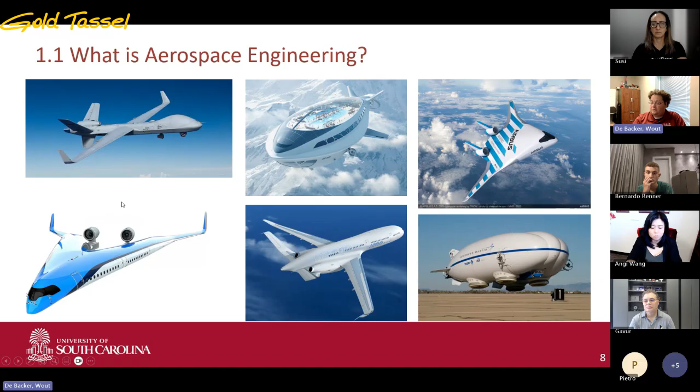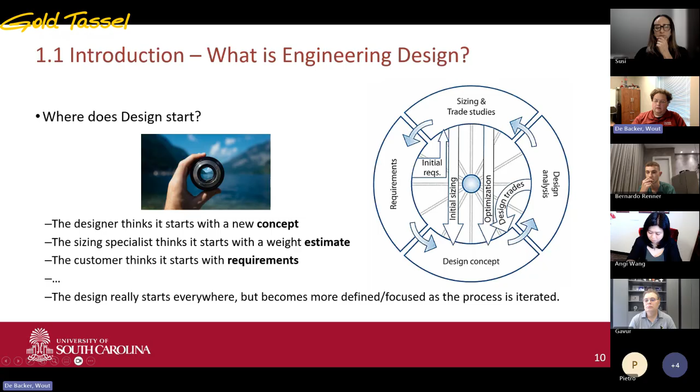So in my classes, for example, this class on engineering design, it's not just about learning how to draw an aircraft. It's also learning how to design an aircraft. So doing the math, doing the statistics, and of course also a little bit of how to draw an aircraft. So we get familiar with the design process. We learn how to move into uncertainty, which is really the key of design.

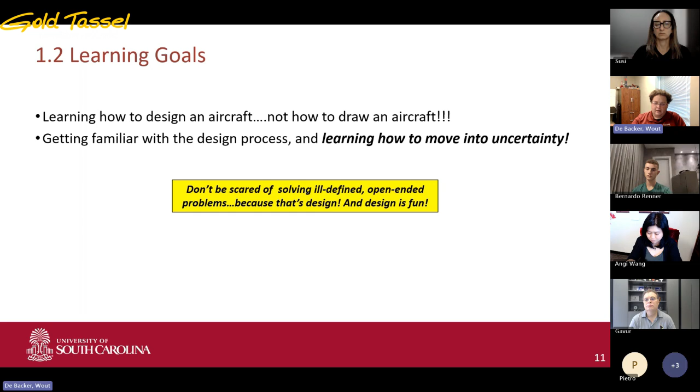If you ever are overwhelmed, or if you are ever thinking, okay, what do I do first? I have so many things to do. Designers love that. They call that not being scared of having open-ended problems, having ill-defined or poorly defined problems, because all of that is part of design. And as a designer, you think that's fun. So you think design is fun. So if you see like you have too many options and too many things you could be doing, well, that's the fuzzy cloud. How do we go through iteration on iteration to make it a little bit more sharp so we know exactly what we need to do on our next step and come up with a real working design?

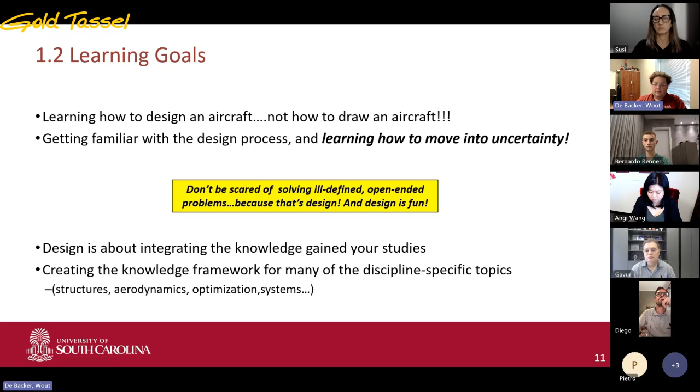Well, that's the idea. How do you turn that into a design? Well, that's where the engineering design process comes in. We turn it into blueprints, we become the architect of our dreams and build it into something real. So that is the main design process.

I know this is only a couple slides of introduction to aerospace engineering design, but it gives you a bit of an idea of the type of topics we talk about. And of course, after a while, there's a lot more equations, but I'm not going to do that to you. I'll show you one equation today, and that's all.

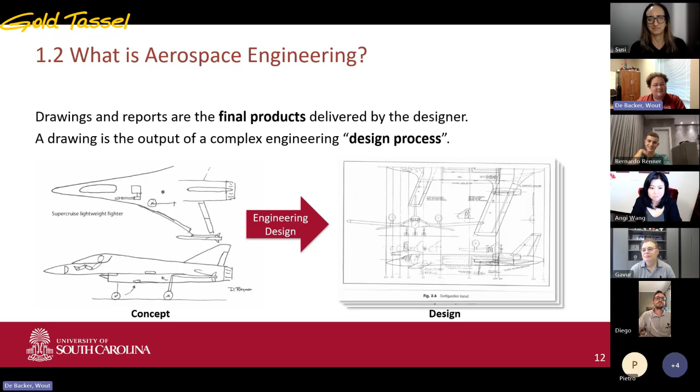So as an aerospace engineer, now that you have a bit more of an idea of what it means to be a designer and an engineer, let's look at some key fields of study that bring this all together. And in the background here, I will try to include as many pretty pictures as possible.

So when we bring all those fields of study together, they all have to collaborate. And more than any other discipline, aerospace engineering is about finding compromises between all the different parts of a problem that you're trying to solve.

If you ask someone who does aerodynamics what is the best airplane, they will give you something that looks like this airplane here, which is all very sleek and sharp and looks very aerodynamic. But if you ask someone who designs the engines, they're like, well, let's put the biggest possible engine in it. We love big engines, so let's make it go fast. Or someone who designs the electrical system will say, we need all the electrical system to power everything.

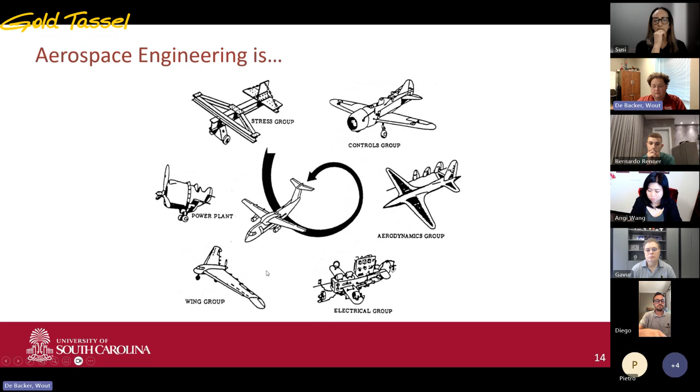But it's really not one or the other. It's a combination of everything working correctly together, interfacing correctly together, that gives us a good quality, coherent design.

So some of the fields of study you may see in aerospace engineering are related to aerospace structures. So you think of manufacturing, fabrication of an aircraft, and analyzing the structure, testing it, doing fatigue and fracture mechanics, seeing how long the aircraft will live, at what point we need to start replacing parts of the aircraft, doing a stress analysis or a load analysis, and selecting the right materials and defining new materials that work for our designs.

And they can't be too strong, because then it means the aircraft will just be too heavy. And they can't be too weak, because then, of course, we have to redesign the aircraft. So it has to break at a certain exact percentage of deflection here from the ground. And that's what we do.

I always like to joke that as an aerospace engineer, we try to make things that just don't break, or don't just break, right? What that means is we make things that are designed to break at a certain point, but usually that point should not occur during normal parts of the aircraft's life.

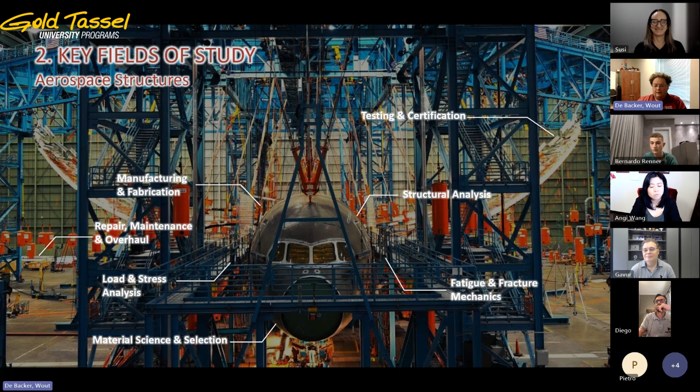Other parts of this may be flight performance and propulsion. So think of dynamics, looking at weight and balance. Where is the center of mass? How much thrust do we need? What does the airplane performance look like? The stability and control characteristics. Can we fly the aircraft? Can we land the aircraft at low speed? Do we know what the equations of motion are?

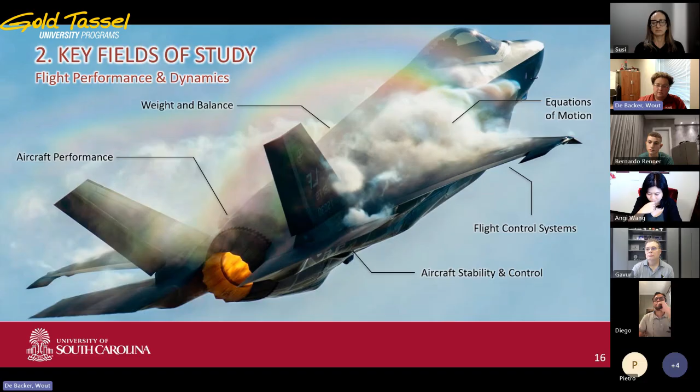How is it going to behave throughout its life? How is it going to behave when we fly through a storm? Do we need special computers on board that can help us navigate through different weather events? And of course, power, right? A lot of aircraft design is around the engine. So thermodynamics are going to be a big part of that.

Heat transfer between the hot combusting fuel and the fuel tanks themselves. Because what is a rocket, but just a fuel tank on top of a nozzle? Looking at rocket engine design and components, propellants and combusting, how can we get the best performance out of our fuel so that we can carry less of that fuel, and optimize the weight as much as possible.

Think about new concepts: propeller engines, turboprop engines, combustion engines, gas turbine engines, electric engines, hybrid propulsion techniques. All of that ties into strong backgrounds in physics, in thermodynamics, in knowing what energy we put in and what energy we put out, and how little losses we can have along the way.

So we're looking at new types of propulsion for aircraft. In particular, electric and hybrid propulsion are now at the forefront of the development.

But then in space, we're looking at what is the effect of the space environment? What communication systems can we have? We all use GPS now or something similar to it on a daily basis. That had to be put up there at some point. What kind of electrical systems do we need for space systems? And how do we make sure that our satellites don't fall out of the sky?

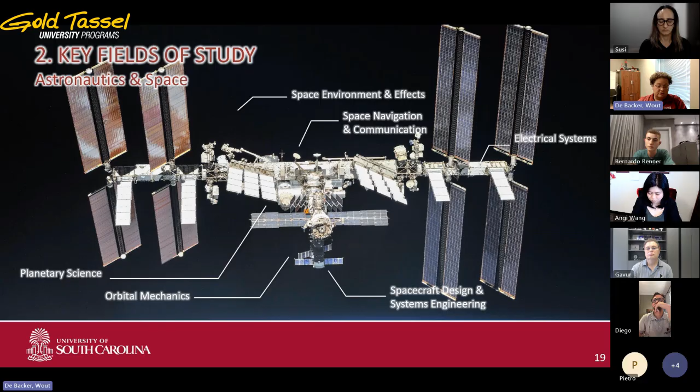So the orbital mechanics and the planetary science we can do from space can help us predict the weather, can help us predict forest fires, or can help us deploy emergency personnel to disaster sites, for example. And all of that requires spacecraft design and spacecraft systems engineering, which is something an aerospace engineer would do when they're working in the astronautics and space field.

Finally, I have an example here on aerodynamics, where, of course, a lot of what we do is flying through air or through denser materials. So compressible flow, experimental methods, flow behavior and boundary layers, wing theory, airfoil theory—these are all topics that you will learn as an aerospace engineer if you're interested in this.

And there it is, there's one of the two equations for fluid dynamics here, telling you about the Reynolds number, which is really just a scale number to say, well, if I can make the aircraft smaller, does the air still behave the same way around my aircraft?

So I know I'm throwing a lot at you now. So it sounds like with all the pictures that I've been showing you, we've figured a lot of this out already. So what is there left to do in this field of study?

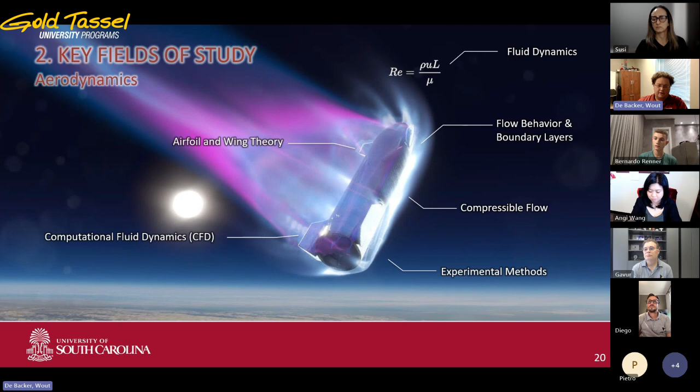They say that aerospace engineering is easy. It's like riding a bike, except the bike is now on fire and you are on fire and everything else is on fire. So how do you get through a challenging design problem here so that even if everything is on fire, you can still survive your mission?

So we are trying to solve the next generation of aerospace problems, and that means environmental impact and sustainability. How can we make aircraft less polluting? They are flying very high up in the atmosphere and they're dumping a lot of fuel. So how can we make that give us the best possible performance?

So how to make them cheaper, how to make them more efficient, how to make them safer and more reliable. Different propulsion systems—think about electric propulsion or hybrid fuel cell technologies—maybe making some aircraft unmanned. So how can we observe sites without having pilots on board?

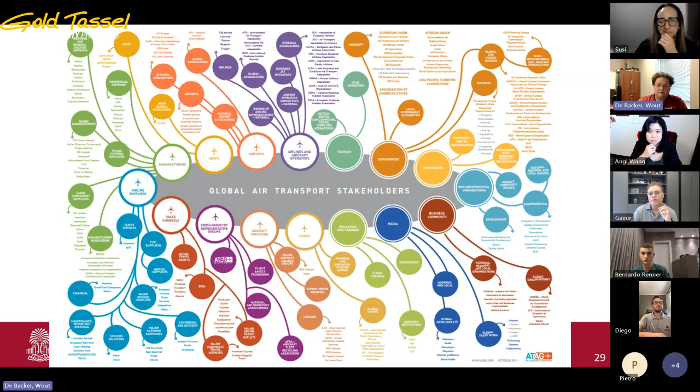Now, I wouldn't be doing my job as a professor at the University of South Carolina if I didn't tell you a little bit about what that means for our students here. So now that you know what the aerospace engineering field is and what we do, how do we approach that challenge here in Columbia, South Carolina? Our primary offerings for undergraduate students are an aerospace engineering bachelor's of science in engineering, or mechanical engineering bachelor's of science in engineering. Those two will get you the closest to the aerospace engineering field right away.

Of course, if you do any other major, you can do minors in aerospace, mechanical, or nuclear engineering. If you already have an undergraduate degree, you could think about one of the graduate programs in aerospace or mechanical engineering. The University of South Carolina's engineering program is ranked 81st in the nation and among the best engineering schools in 2025. We have a 12-spot increase over last year's program, and it looks like we will be going up again this year — our program is getting higher rankings every year.

In terms of numbers, this year our aerospace engineering freshman class started with 127 students. This means we are already in the top 15, if not top 10, of aerospace engineering programs in the United States. This is really a countrywide effort, going from a very small program to now one of the larger programs in the country. Our senior year students — I think we have about 35 students graduating — so we do see a lot of students trickling out. It's not for everyone; people see the pretty pictures, but there's a lot of math that we didn't cover today.

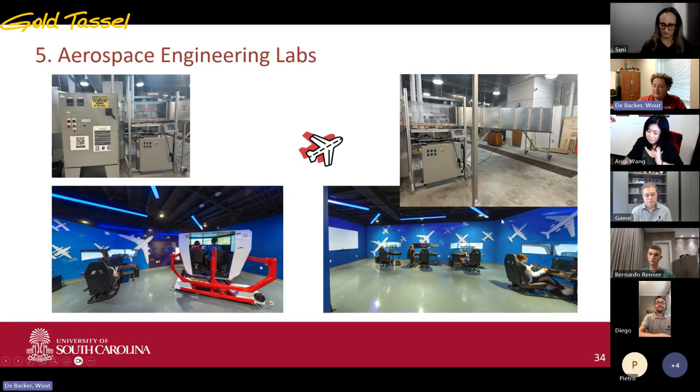If you do decide to come to USC, I would highly recommend that you get engaged with some of our extracurricular clubs and societies. In particular, the most active one is AIAA, the American Institute of Aeronautics and Astronautics—it's the largest aerospace-related professional society. If you want to network and find a job in the field, AIAA can help you with that. We currently have about 100 students in this organization, and there are about 36,000 worldwide members.

That includes all the big ones, including Embraer—if I remember correctly, they are a corporate member of AIAA. The Society for the Advancement of Material and Process Engineering teaches you everything you need to know about how to make composites and high-quality composites for aerospace. If you like more of the space side of things, you could join the Rocketry Club, or if you want to learn how to fly, our flight club can help you with that.